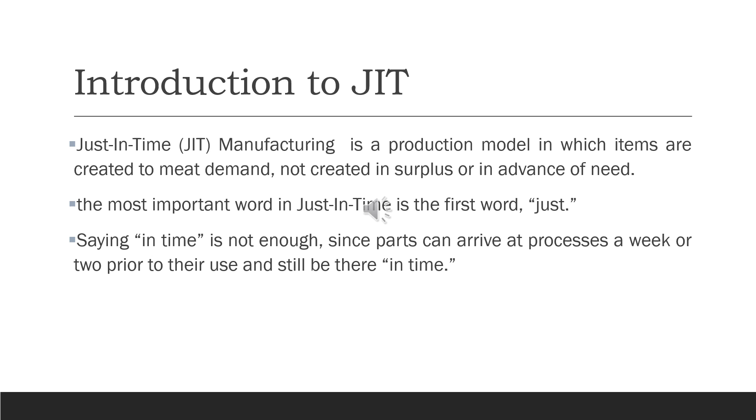Implementation of the JIT production system is attributed to post-World War Japan. The JIT production system first gained public attention in Japan in the aftermath of the 1973 oil crisis. A strong diversification trend was born, and Japan's economic growth slowed to a more modest rate. Amid this environment, the JIT production system gained media attention as a recession-resistant production system.

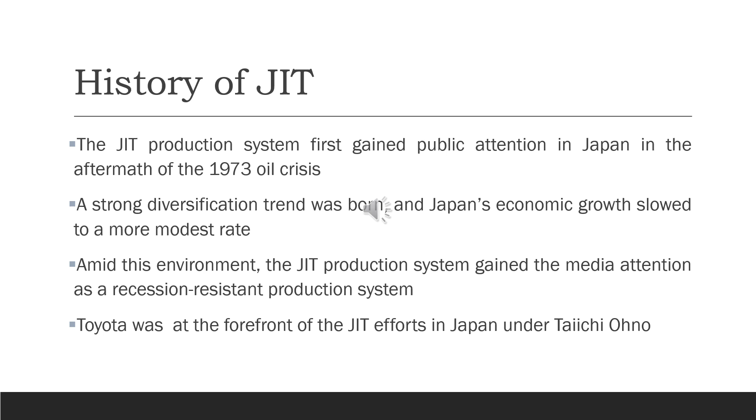Toyota was at the forefront of the JIT efforts in Japan under Mr. Taiichi Ohno.

The major principles of just-in-time manufacturing include Kanban, leveling, changeover, flow manufacturing, visual control, Jidoka or human automation, standard operation, multiprocess operation, manpower reduction, quality assurance, maintenance and safety. We may look deeper into these principles.

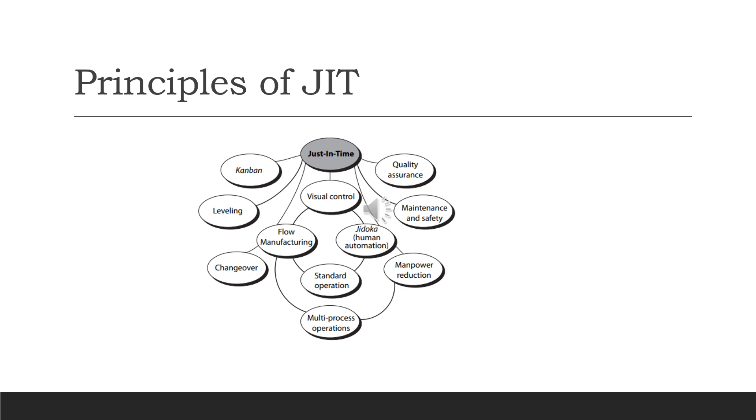The first principle of just-in-time manufacturing is flow manufacturing. By flow manufacturing, we aim to enable the material or work-in-process to continuously move from start to finish without large breaks or pileups, like smooth moving traffic without any signals or blocks. Each workpiece has to move through a chain of processes to be correctly processed within the cycle time.

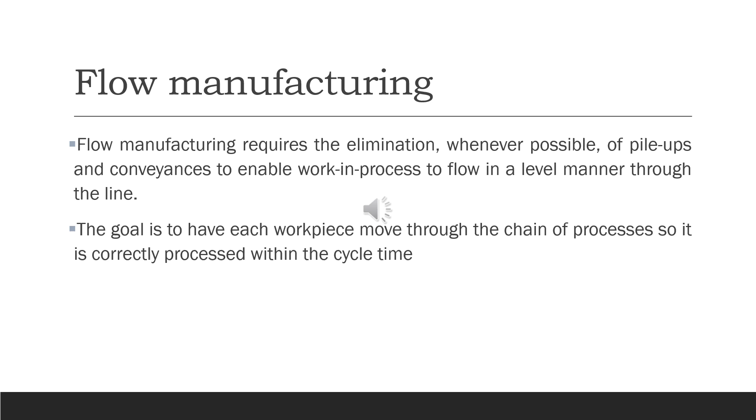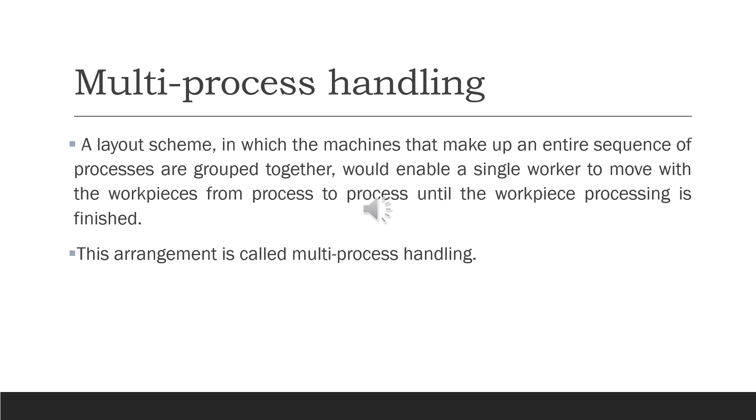Multi-process handling is a layout scheme in which the machines that make up an entire sequence of processes are grouped together. Instead of many different men working on different machines, here a single worker moves with the workpieces from process to process, that is machine to machine, until the workpiece processing is finished. Therefore, the worker should have the know-how to operate different machines. This type of arrangement is called multi-process handling.

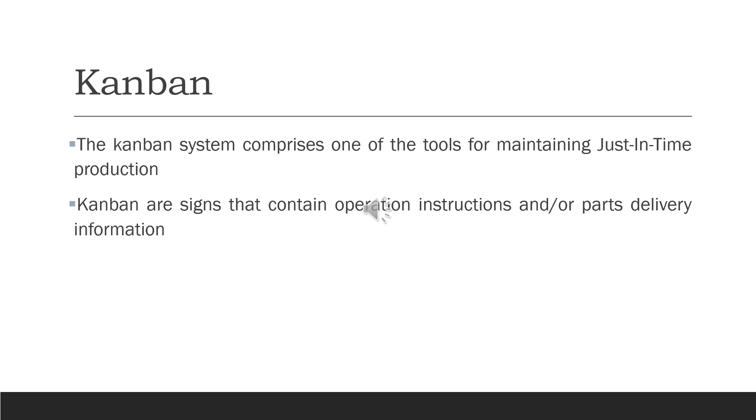The Japanese word Kanban, which means a signboard, is one of the tools for maintaining just-in-time production. Kanban are signs that contain operation instructions or parts delivery information. It tells the worker what to do, when to do it, and where to do it.

Conventional production lines employ a fixed number of workers, aiming to produce the maximum number of products using these workers. But in the JIT production system, the aim is to produce only the required amount of products. Therefore, we employ only the number of workers essential to produce these items, reducing utilization of manpower and also the cost.

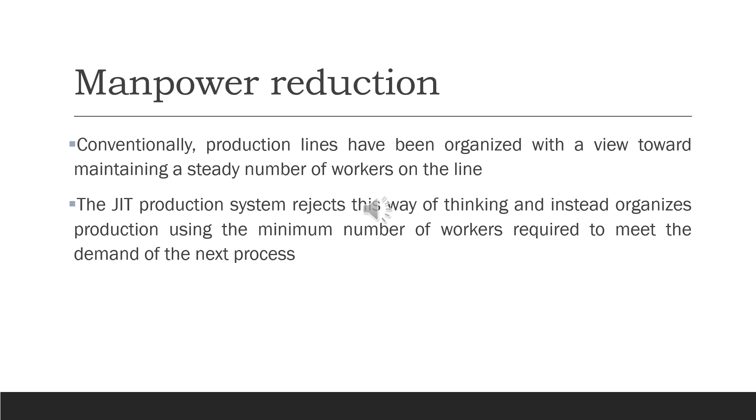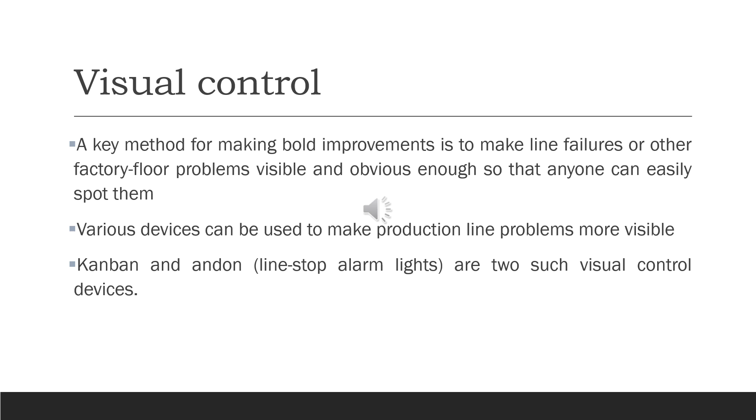Visual control is an important principle used in just-in-time manufacturing. It helps to make factory problems visible so that anyone can easily spot them, helping to improve the system further. Various devices can be used to make production line problems more visible. Kanban and Andon are two of them.

The concept of leveling calls for product types and volumes to be spread out to produce as level a production flow as possible. That is, the production flow rate should be the same. It is fundamental to both just-in-time production and flow manufacturing.

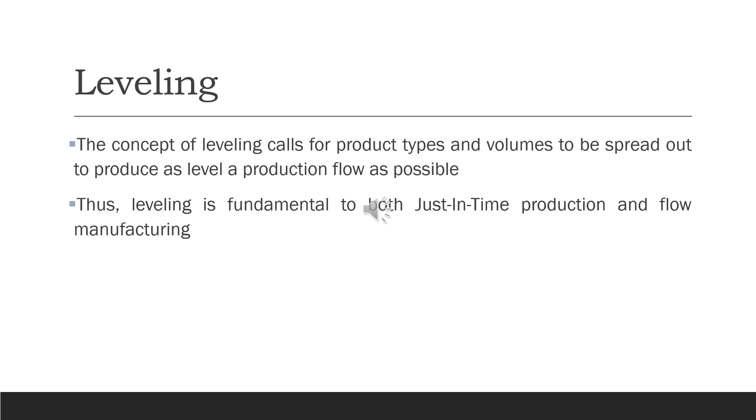Changeover is a broad term that covers not only the replacement of dies and blades but also other operations such as the revision of standards and the replacement of assembly parts and other materials. The goal of changeover improvements should be to shorten the time needed for such operations, so that no time is wasted due to changes in operation procedure. They should make marked reductions in labor hour requirements in order to build a strong, flexible manufacturing line that is adaptable to changes.

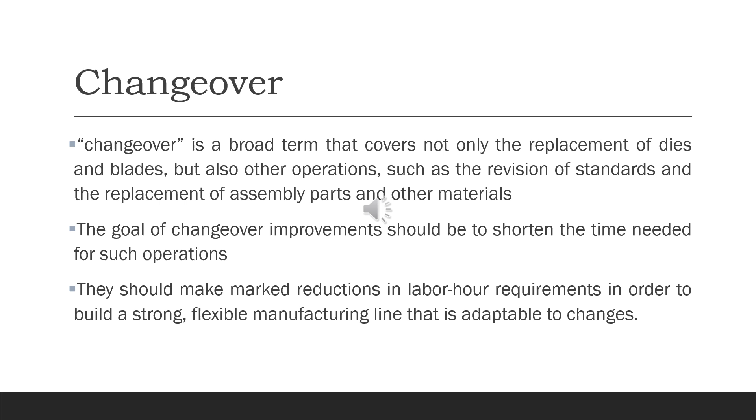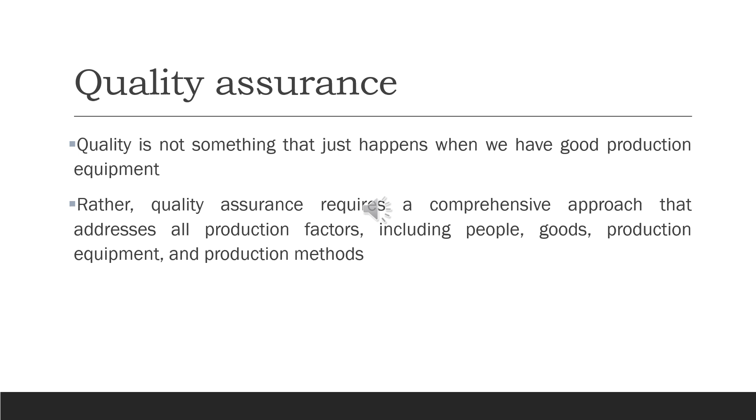Quality is not something that just happens when we have good production equipment. Good production equipment is no use in the hands of an underskilled workman. Also, a highly skilled workman will struggle with bad production equipment. Therefore, quality assurance requires a comprehensive approach that addresses all the production factors, including people, goods, production equipment, and production methods.

Standard operations are essential for maintaining flow manufacturing once it has been established and for keeping pace with the production schedule. Standard operations are the operations that have been painstakingly developed to achieve and preserve an effective combination of people, goods, and machines to produce high quality products economically, quickly, and safely. By following the standard operations, we will achieve a good quality product with less time and less money.

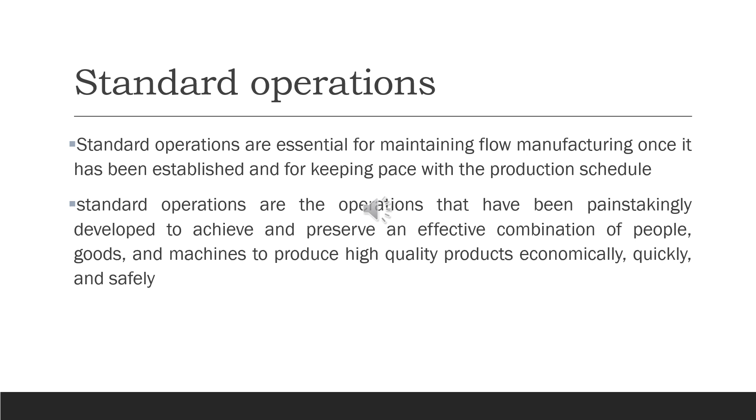The term automation suggests machines take over men. But Jidoka is a special automation process which is given a human touch. It differs from automation in the ordinary sense. It brings humans into the automation process to ensure reliability, flexibility, and precision.

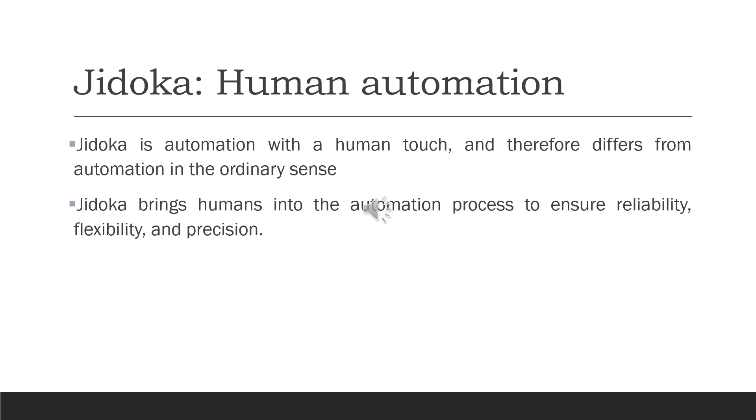Maintenance and safety are two important factors in any type of production system. Especially in the case of the JIT production system, the entire production flow will be stopped whenever even the smallest machine breaks down. Therefore, the JIT production system places great value on maintenance activities that maintain high production capacity. Also, equal emphasis is placed on safety. As we say, safety is first.

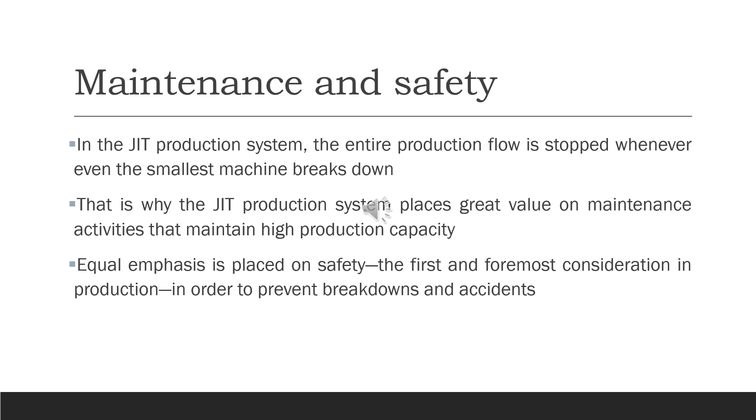We have discussed some of the important principles employed in the JIT system. We can now look into how to implement a JIT system. This can be visualized as a 5-step process.

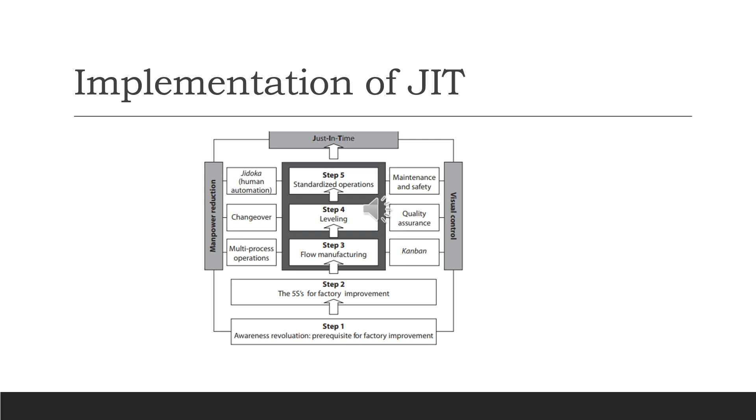In step 1, we will give awareness about the JIT system and how to improve our facility. In the second step, there are the 5 S's, Japanese words starting with S, that are used for improvement in the factory. The third step is implementing flow manufacturing. Then we will carry out the leveling of this flow manufacturing. As a final step, we will employ standardized operations. This will result in a just-in-time process.

Any system can be implemented successfully if there is a need for that improvement. So, as a first step, we have to make people aware of how implementing the just-in-time system will improve the quality of the production.

The second step is implementing the 5 S's for factory improvement. The 5 S's are proper arrangement, orderliness, cleanliness, cleanup, and discipline. There are 5 words starting with S in the Japanese language.

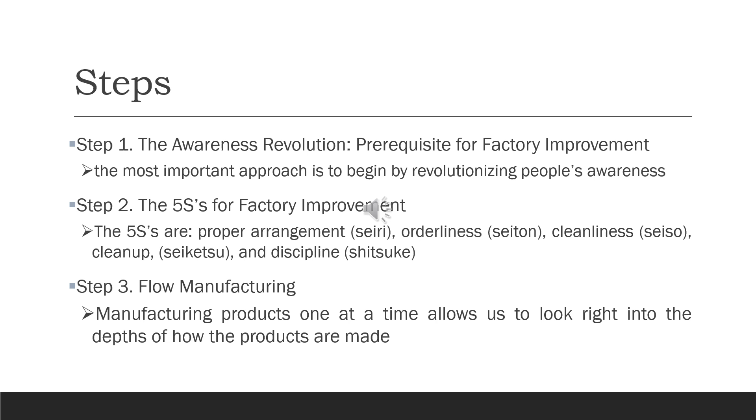Step 3 is introducing flow manufacturing. Manufacturing products one at a time allows us to look right into the depth of how products are made. A flow manufacturing process is implemented.

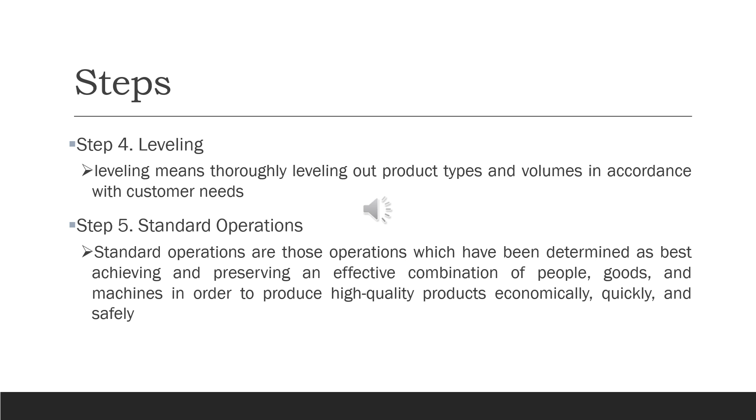The next step is leveling the flow manufacturing. Leveling means thoroughly leveling out product types and volumes in accordance with customer needs. As the final step, we will introduce standard operations. Standard operations are those operations which have been determined as best achieving and preserving an effective combination of people, goods, and machines in order to produce high quality products economically, quickly, and safely.

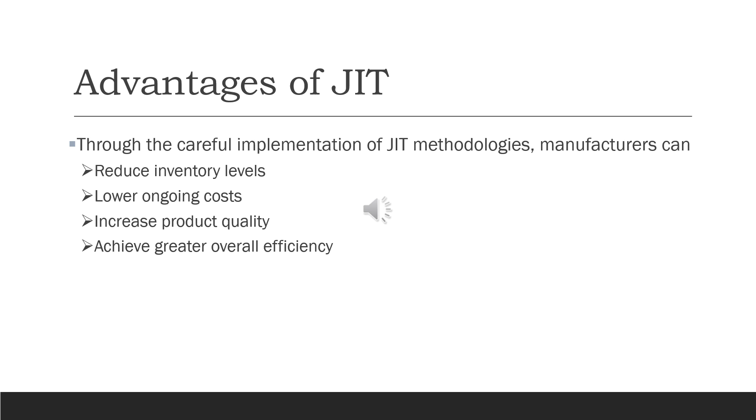By carefully implementing the JIT methodologies, the following advantages can be obtained: we can reduce inventory levels, lower ongoing costs, increase product quality, and achieve greater overall efficiency.

As with any other manufacturing system, JIT manufacturing is also not without risks. As the COVID-19 pandemic showed, JIT processes are highly susceptible to disruptions in the supply chain. If a manufacturer cannot get the material it needs to carry out production, its entire operation can be brought to a standstill, incurring heavy losses for the firm.

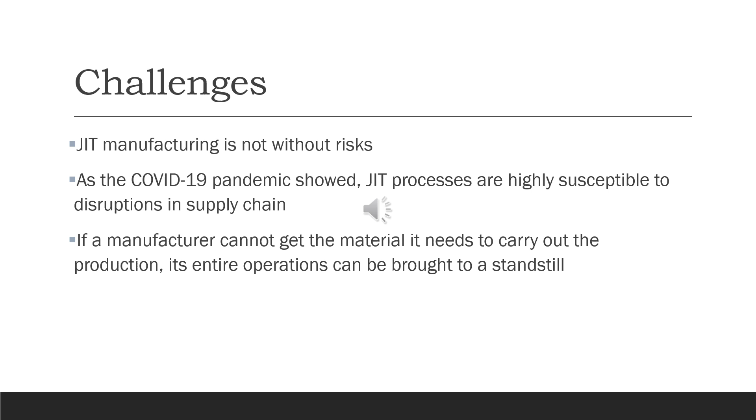Because of the above said risk, some companies have adopted or bounced back to just-in-case manufacturing, also known as JIC manufacturing. In this system, companies maintain a large quantity of inventory to insure against supply chain disruptions. However, this approach comes with significant cost for purchasing and maintaining that level of inventory. Going forward, manufacturers will likely find a balance between JIT and JIC to effectively control overhead while minimizing supply chain risk.